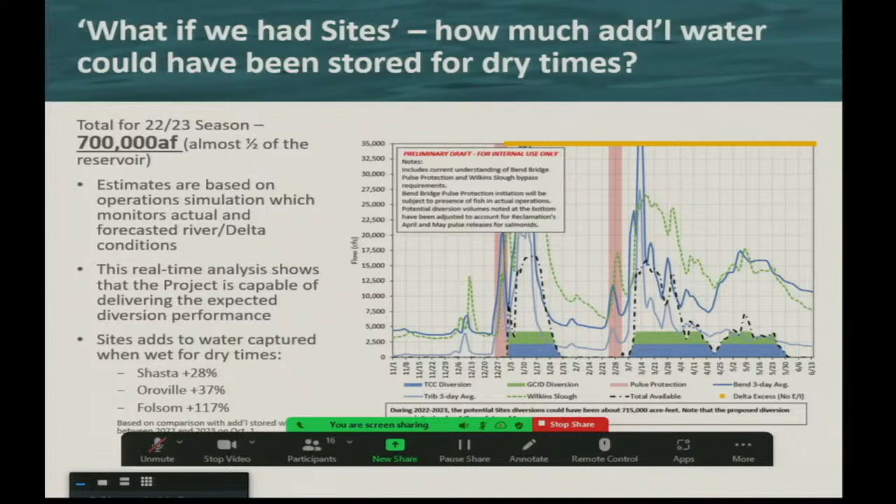And you know, when you look at the 700,000 acre feet, it may not seem like all that much, but when you put it into the context of what we're carrying over in our reservoirs for these dry times, it is substantial. You see the comparisons with Shasta, Oroville, and Folsom storage. This has substantial contributions to the amount of water that we will have available to us in the dry times in the future.

The Sites Reservoir project is a local-led project, and this is very important from the perspective of the north-south matters related to water. One of the reasons that it has taken so long is that the federal government and the state government were in charge for many of those years, and the local people did not like that. And it wasn't until they took charge in 2010 and formed this Joint Powers Authority that they actually started to get behind the project and local support grew.

And you know as well as anybody that you have to have local support for something like this to actually happen. So it is because of the leadership of these agencies and the folks involved that we've been able to get as far as we have. But it's really important to understand and realize that this is a local-led project that has statewide benefits.

It's a project that is uniquely situated relative to other elements of our water management system in California. And it's a project that really is adaptable for the changing climate that we are seeing and that is going to continue to evolve. We have analyzed Sites and determined that under any of the climate change scenarios that are out there today, anywhere from 0 to plus 15% is the improvement in the project as climate evolves and changes.

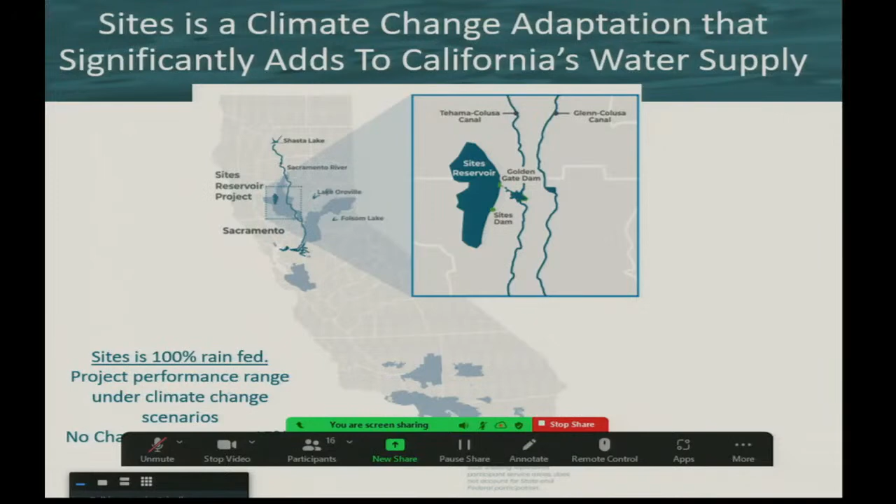And that's really important for us as a state, because we have to find ways to be able to manage water under these changing climate conditions, and having another resource like the Sites Reservoir helps us do that. Sites is 100% rain-fed. Sites is not dependent on snowpack, and that is largely why you see the improvement in the performance of the project with the changing climate.

Many of you have already been up there, seen the site. It's a beautiful empty valley, currently used for mostly cattle grazing. Spans about 13 miles long and about 3.5 miles wide in total.

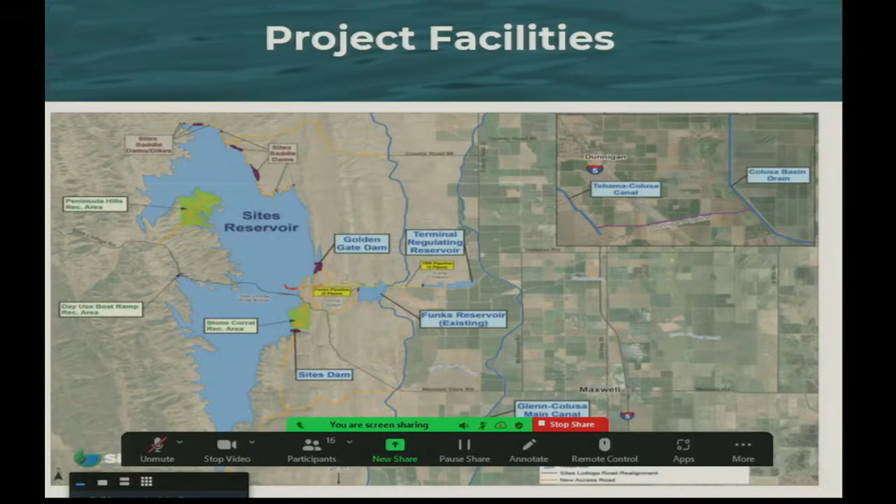Very important point here, these two canals, these two blue lines that run up and down the map here, those are existing canals that we're relying on for the conveyance of water in and out of the reservoir. Without those canals, we would not be a cost-effective project. So it's very critical to rely on the existing infrastructure as part of the facilities.

We have many participants, 22, that are all participating financially in the project. No one yet has actually made a firm final commitment in the project, and that is important because we're still studying and evaluating the project. But that point is coming very soon, probably within the next 2 years. Metropolitan Water District, of course, is on that list as a participant at this time.

And we have a waiting list. Right now, that stands at 13 participants, including yourselves. Thank you very much for your expression of interest in the project. That's been very important for not only the participants to know that this is a project of interest, but also statewide to highlight and allow other policymakers to see the need that is out there, the unmet need that has to be accommodated, which the Solve the Water Crisis Coalition is bringing forward in a very meaningful way.

I wanted to focus a lot of my attention on the Metropolitan participation, since you are a member agency of Metropolitan. So you see here each of the participants' quantities and amounts of the project in terms of their storage in the reservoir, but also the state and federal government.

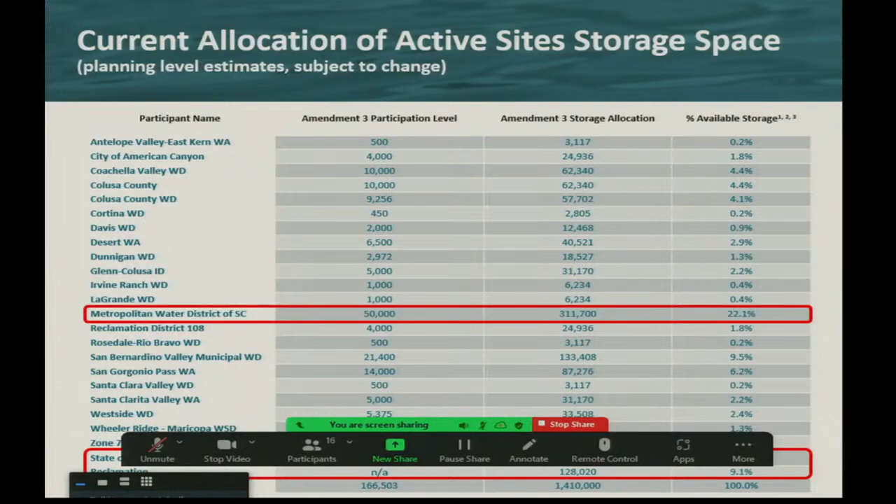And primarily the benefit that the state and federal government are investing in is for environmental purposes. We can't leave the environment behind. When climate changes, it affects the environmental flows, and we have to build projects that accommodate for those needs as well as for people and farms. I always like to say it's important, if you're going to spend $4.5 billion on something, that you know what you get. And so this is meant to describe that.

There's two things you get when you invest at Sites. You get a share of the storage space, so you get your own little condo in the condo complex. And you get a proportional share of any water that we're able to divert. And generally speaking, we're expecting about an average annual of about 300,000 acre feet.

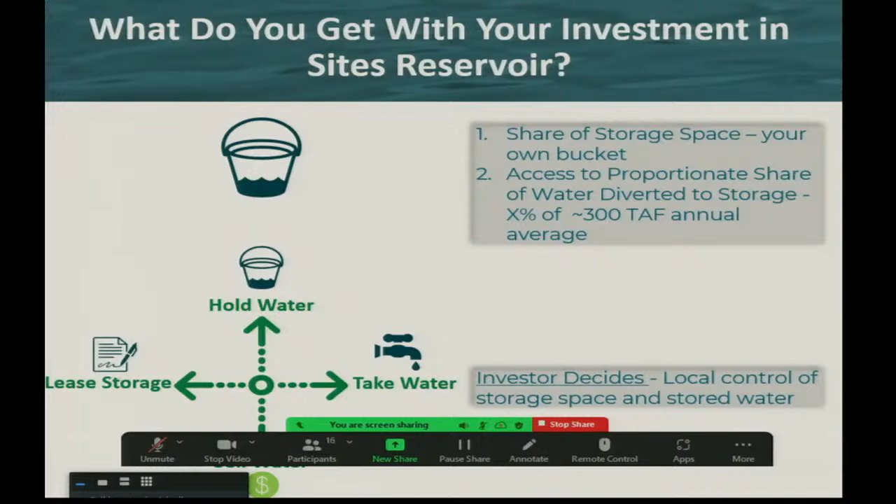So when you look at somebody like Metropolitan and you say, okay, they got 22% of the storage. So looking at 700,000 acre feet this year, 22% of the storage using those guarantees, they would have been able to put 155,000 acre feet of water into their 300,000 acre feet of storage space. That's for them to decide.

So that's how each individual agency kind of gets to manage their own piece of the reservoir and have local control. They could also forego their water if that's what they choose. I doubt they would do that, but they could do that, and someone else would be able to put that in their empty storage space. They could lease space for someone else. So what this co-op system creates is a way to exchange within the reservoir, and it makes for ease of movement of water across the state. And because the project serves all parts of the state, it helps the state better manage the water resource.

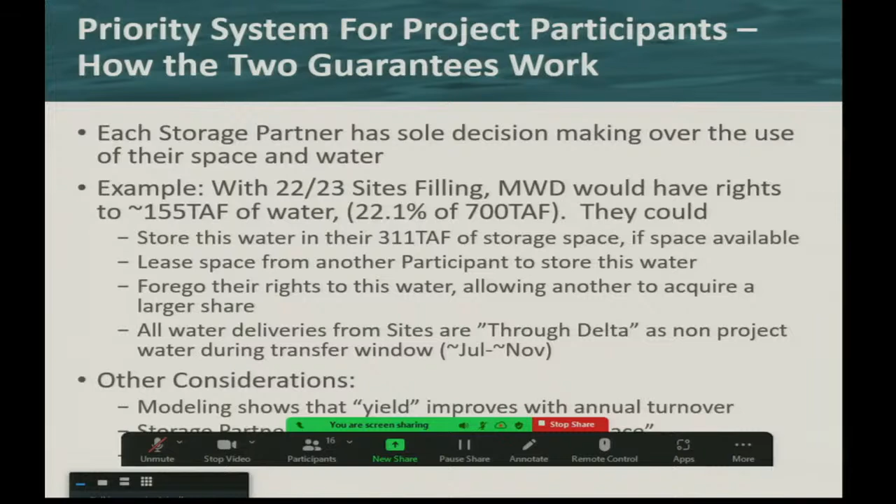And then the last thing I would just mention in terms of the waiting list is that as a waiting list participant, what we're trying to establish is that in that position, you are somehow given some priority over others in terms of your ability to receive transfers out of the reservoir. If we're not able to accommodate you within the context of being a full participant, we want to try to recognize the support and the contribution that you've made by giving you these kind of first rights of refusal to the transfers. And that's what the plan is as we go forward.

Funding is a very important part of any project. We are in a position where we have a majority of our funding fairly well lined up. A large part of the local participant funding comes through what is the WIFIA loan that we were awarded by EPA last year for a little over $2.2 billion. That's 49% of the project costs, and we're very thankful for EPA's recognition of the importance of this project.

The state is coming from Prop 1. Voters of the state in 2014 approved Prop 1 to include $2.7 billion. Sites is the largest recipient of that amount, and that again is mostly for ecosystems, but also for recreation and flood control. And then the WIIN Act, the federal contribution, and we're accumulating funds there.

A 16% contribution is what Reclamation has said they want. Right now, we only have room for 9, but they continue to accumulate the funds to get to 16. So all together with all those sources, we have the funding all lined up and ready to move forward. Reminder, a WIFIA loan is a loan, not a grant. So all that money will have to be paid back by the individual participants.

I don't mean to get into your business, but I want to share this because I think cost effectiveness is important for this project to move forward. Affordability is critically important for our participants. And this is intended to illustrate the affordability of the project from a Metropolitan perspective. Generally speaking, out of the reservoir, it's about $850 an acre foot on a unit cost basis. Estimate $450 to get it down here into the Met system. So total, all into the Met system is $1,300 an acre foot is the current estimate.

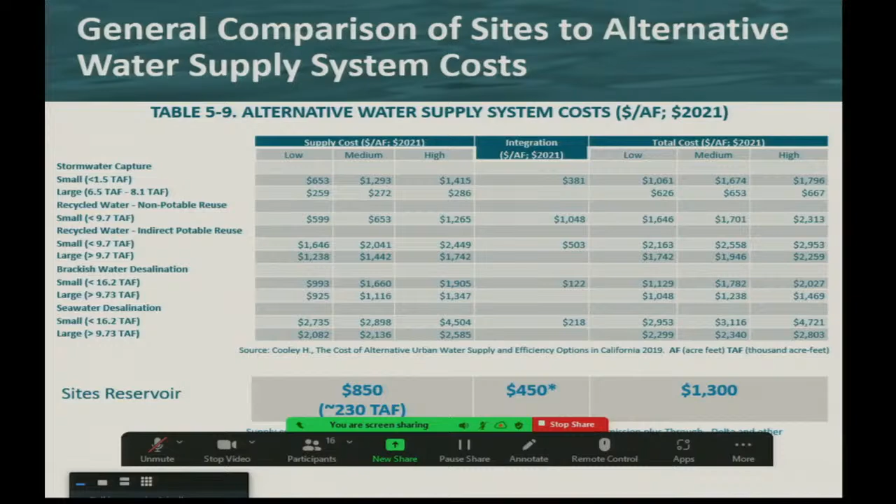And when you look at some of these other opportunities that are out there for water supplies, it is very competitive relative to these other opportunities. And I would also point out that it is substantial in terms of the amount of water that it generates compared to these other opportunities as well. Just want to give you a real quick update on a few areas.

Environmental planning and permitting. We are culminating a 6-year process, hopefully next month, to finalize and certify our EIR-EIS. That has been a very useful process for us, I think, because we've seen the project evolve and change to be something that is not only affordable but also permittable, and no project in California can get built without permits.

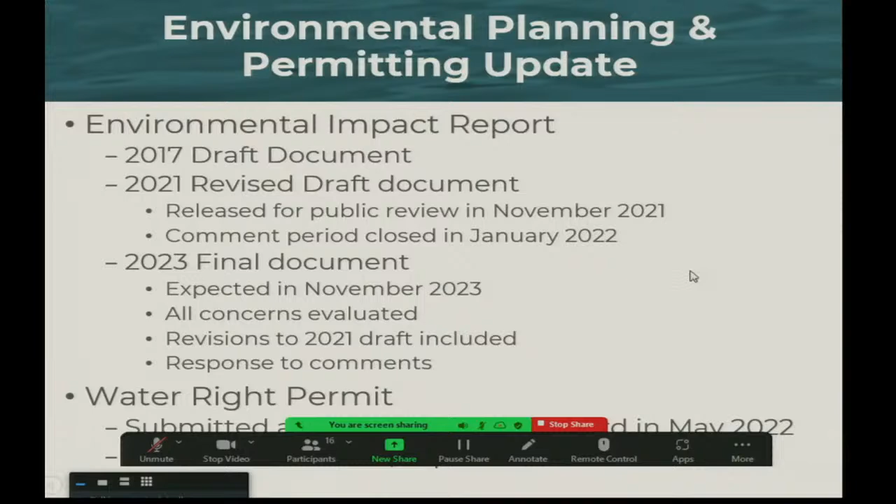The water right is a very critical element of our project. We are currently in the application and review process with the State Board. You might have heard we just closed the protest period, and I wanted to share, I'm trying to go to the next slide, but I'm not going. I wanted to share, if you could help me, thank you very much, appreciate that, Justin.

Others of these, I would say generally they're more concerned about the general aspects of taking water out of natural flow and also effects in the Delta, which we feel we have addressed, but they have some concerns that continue. And while we've been working with all of these folks for the last 6 years in our environmental process, and I mean literally having workshops and discussions about everything that we're doing, there's still some concerns that are felt to raise to a level of the State Board intervention.

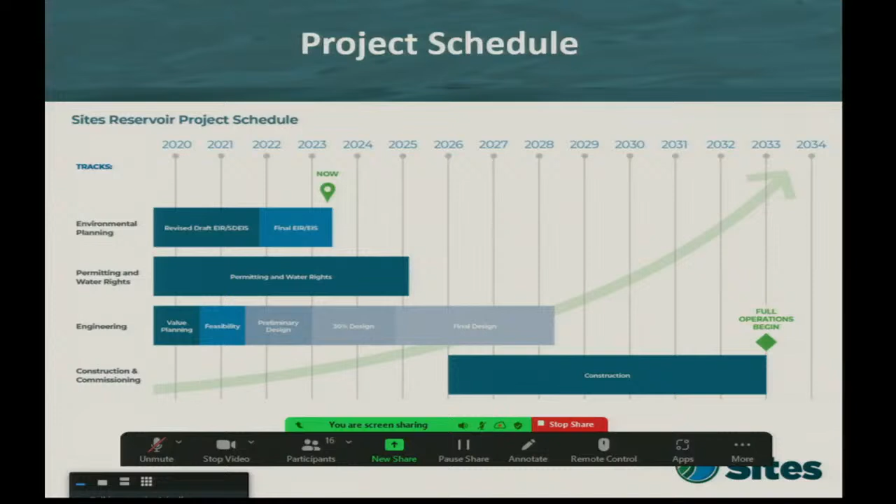On the schedule, this is my last slide. On the schedule, I mentioned 2 years from now, people got to make a decision. That's after we get the water right and a couple of key permits. At that juncture, then, all of the 22 agencies in the state and federal government will make their final commitments. Everything will kind of settle out as to where everybody lands in terms of their participation. And then we'll break ground and move forward through construction, which we estimate to take about 7 years, and completing in 2033. So with that, I'll conclude my presentation and be happy to answer any questions that you might have.

Thank you very much. Do board members have questions? Okay, go ahead, Laura.

Sorry. You mentioned when it had the protest slide that DWR did not protest, which was great. What was the second agency that you mentioned that sent something in, but it ended up being more of a comment letter? Bureau of Reclamation. Oh, that was it. Okay. They operate the Central Valley Project. Okay, Bureau of Rec.

I think I know what you're going to say, but the waiting list, is that because there just isn't enough capacity for all the people that want to draw from there? Yes. Okay, so they're on the waiting list in hopes that maybe someone will drop out and they might get it. Yes. And I'm trying to say also, they have a role to play here. You all are playing a role in helping to implement this project by being on the waiting list. You're showing your support. You're showing that you have a need. That is an important role to play in this project, and I say that should be rewarded to some extent. So I'm talking to the board about this first right of refusal idea. Okay, I like that.

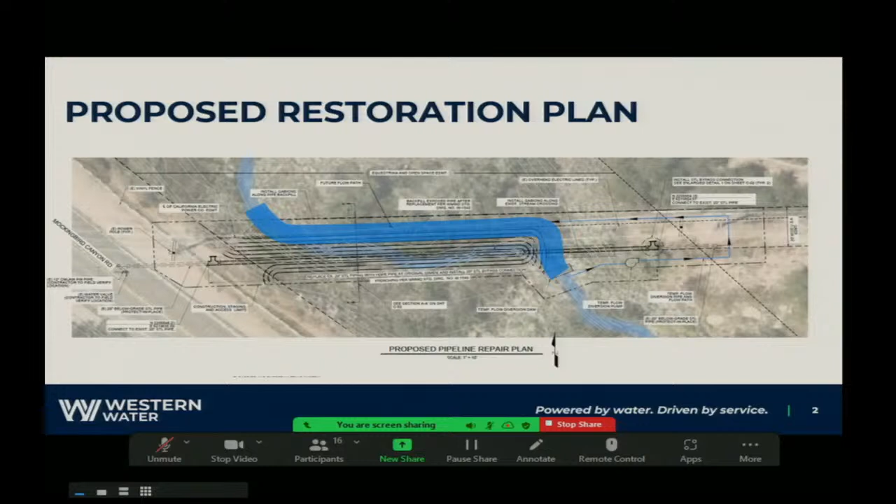We're also going to temporarily bypass the creek. We're going to put that into a temporary pipe, and then we're going to do all the construction. So we're going to basically move over the creek, and then we're going to have a space to put the pipe, reassemble the new pipe, and then we're going to backfill everything and put in gabions. The gabions will prevent the creek from wanting to go right back to where it was. Like retaining walls? Right, exactly. So that's the description of the project.

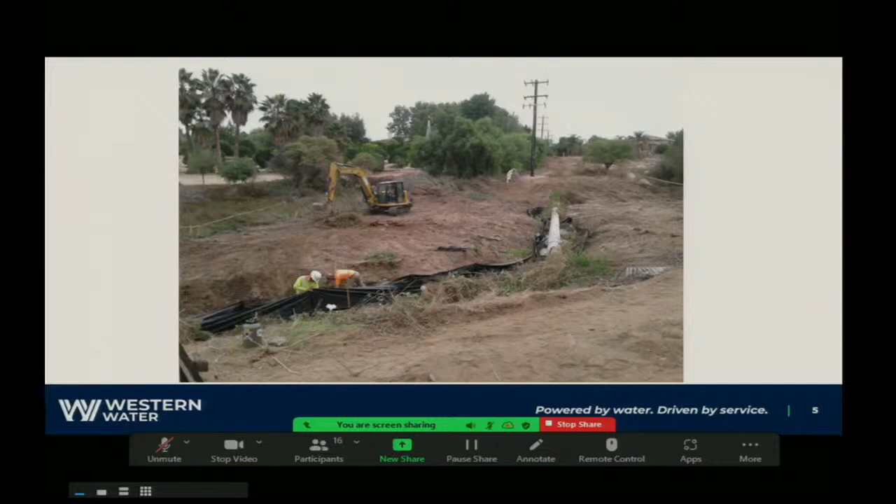So this is us removing the vegetation around there. Again, we got a permit for all of this work under the emergency permit with the Army Corps. And you can see the pipe where it is undermined. It's just not supported at all. So this is another photo of it. You can see we've graded the other side. That's where we're going to move the creek over to. And you can see them putting up basically filter fabric for allowing the creek to move through without erosion as we're moving materials around. You can see here we put some pipe supports below the pipe. We're like, hey, let's support this now so nothing happens.

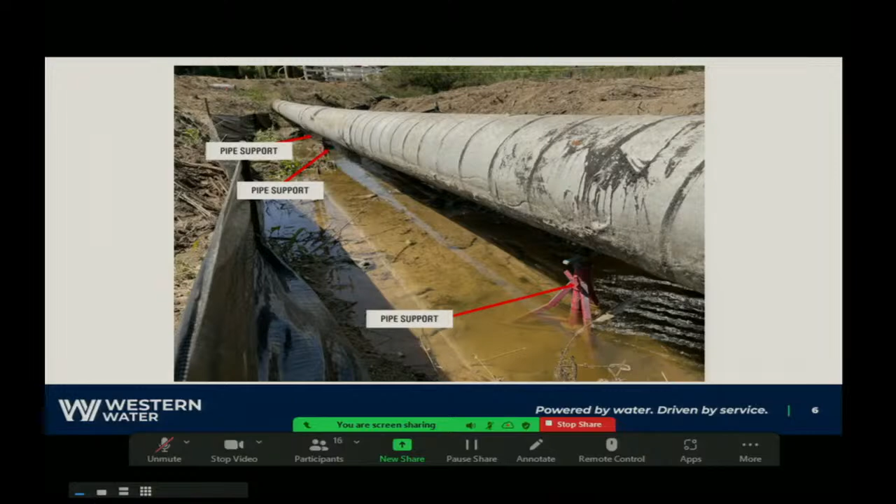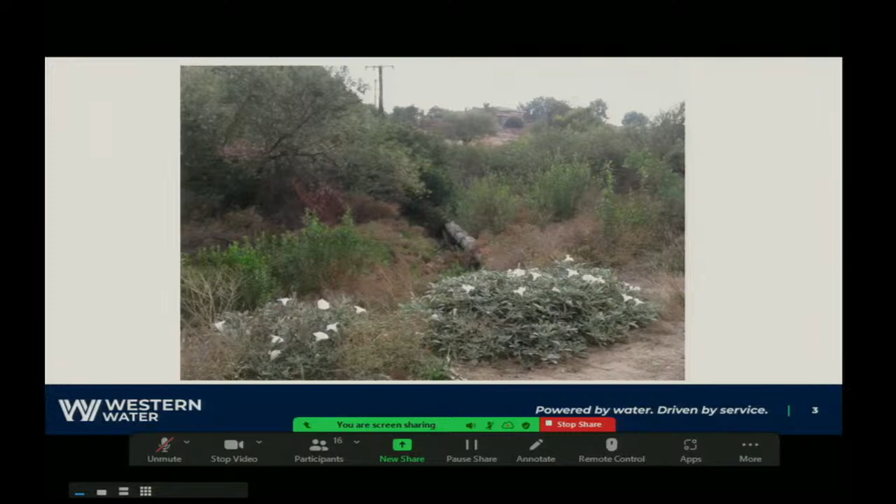And the thing is that we put this there. You can see we put the supports in right away. And over this last weekend, what happened was the thing sprung a leak. It was a slight leak, about 15 gallons per minute, but that's a precursor to, oh my goodness, that's a lot of flow. So we immediately put in a repair band. And a repair band basically is like a little rubber clamp that you put on there and you just cinch it down. Now, it only reduced it to about 1 or 2 gallons per minute. It's very temporary. It's like a Band-Aid.

And so we had to do an actual all-out repair. So we emptied the line to remove the pressure so we could weld on there. You have to basically chip away the concrete coating, and you have to make a spot so you can weld on the actual repair. And during that time, of course, you can't have it under full pressure. So we had to empty out about 400,000 gallons of recycled water very slowly into the creek. Of course, we did notifications to the Regional Water Quality Control Board, and we do have permits for emergency type repairs for that. And we dechlored it, and we let it out in a way that wouldn't cause erosion. So we put it in at the capacity of the creek.

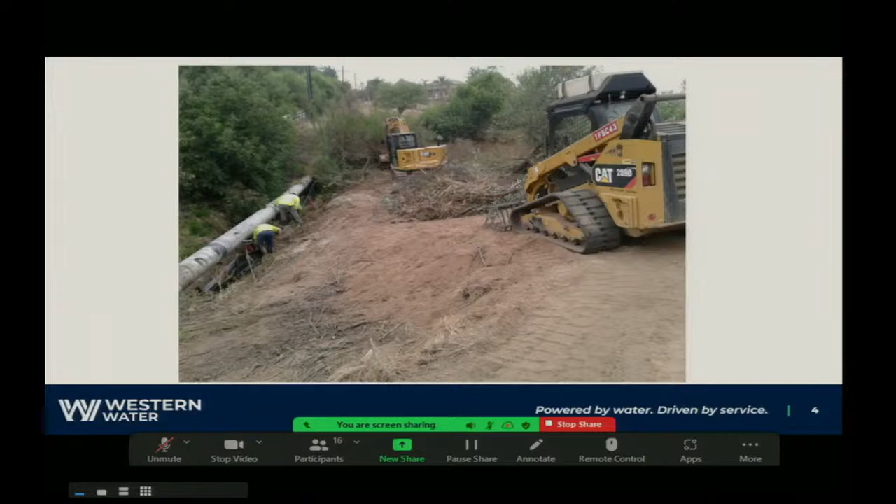So it's a good thing that we were out here at the time when the thing finally did start to break, because if we hadn't, then a catastrophic break is uncontrolled and will cause a lot of erosion and will cause a lot of damage. And if you go downstream from here, there's homes that are right next to the creek, there's a whole bunch of other things. So it's very fortunate that we caught this when we did. And I'm happy to say that the pipeline, as of this morning, is back in service, and we're serving our customers. And we are going to be doing the line stop on Monday, according to schedule. So it looks like we're going to recover. You know, we'll see what happens over the next few days because of this little thing happening.

And another aside, as far as challenges, the Army Corps, at the very end of last week, said, I don't know if this is an emergency. They did that on Friday. They were like, I'm looking at it, it looks like it's been there a while. I don't know if it qualifies for this permit. So we got busy, right? So we immediately got together a comment letter back, and we explained the entire situation of why we think we need to head this off before it becomes a problem, before it breaks. And they actually replied back on Monday, after it already leaked, and they said, you know what, you're right, it's an emergency. So they actually did agree with us as far as our approach. And we did not have to say, well, you know, it actually did break. It started to break. So we do view this as an emergency type repair.

So as far as the project schedule, we've been constructing the stream realignment, which includes that grubbing, all the grading that you've been seeing in September. We're putting in the temporary high line. We're in the midst of that right now. We're going to be removing the old pipe from October 16th through the 20th. We're going to install the new pipeline October 23rd through the 27th. And we're going to install the gabions on October 30th through November 6th, and then we'll complete the project November 6th through the 15th. That's our current schedule. What I've heard is that we should still be on schedule. We were actually a little bit ahead of schedule before the leak, and that's the only reason why we can recover and keep the schedule. But that's essentially my update, and I'm opening this up to any questions.

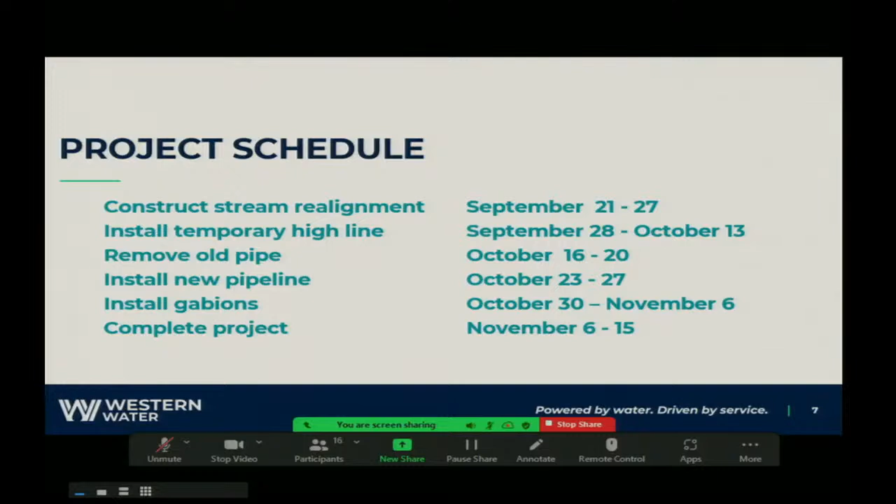Thank you, Derek. Any questions? No, just very, very good job, and glad you were out there when you needed to be. That's just great job in keeping this all intact. Do you need a motion to continue it? Yes, we did. So moved. Second.

Great job, thank you. We have no public comment? We do not. Okay. Would you please do a roll call vote? Thank you. Director Torres? Yes. Director Dinstead? Aye. Director Roten? Yes. Director Rizvi? Yes. President Gardner? Aye. Thank you. The motion carries 5-0. Thank you, directors. Thank you. Thanks, Derek.

Brings us to reports. Mr. General Counsel? I have no report, thank you. Mr. General Manager. I was hoping General Counsel would have a longer report. I got a few different things I'd like to highlight. I had a really good meeting with Adel Hagekhalil, the general manager of Met, this week. So that was last week. Whew, weeks are flying by. Last week. Met is super busy. Lots of big issues going on at Met.

So just to highlight our discussion, we talked a lot about PFAS. You may ask, well, why is Met worried about PFAS? Because it's not really prevalent in surface water. But remember, they are working on a recycled water project, and it is prevalent in some recycled water systems. So we are on the same page with Met in trying to get a waiver from EPA, since the wastewater treatment plants didn't cause PFAS and don't put any PFAS in the system. So good to collaborate with them on that.

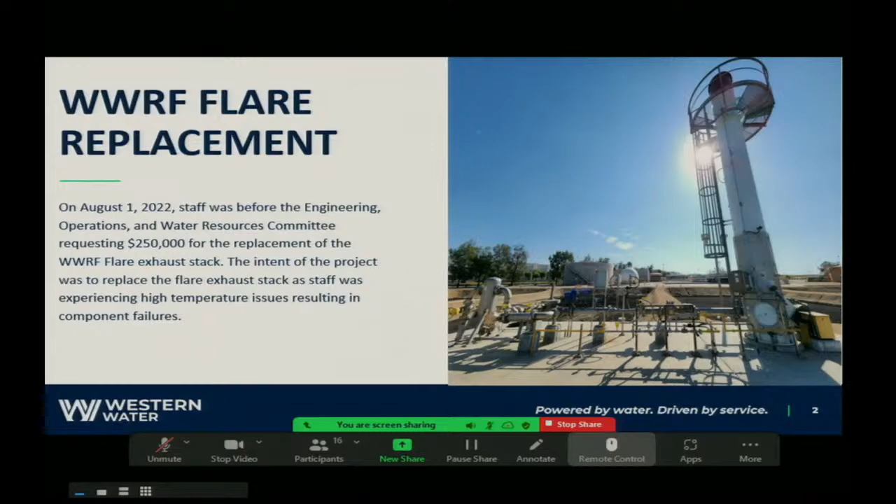We try and utilize it first beneficially in running equipment at the treatment plant, basically overgrown water heaters, if you will. This anaerobic digestion process likes to be about 98 degrees. However, if we don't need any heat to the digesters, what do we do with this excess methane? So we burn it through a flare. And in this photo, you can see the flare off to the right-hand side.

From the outside, the flare looked fine. It's a steel tube, right? And there's a flame inside of it, and exhaust comes out the top of it.

But looking inside, it's a completely different picture. That steel pipe was lined with ceramic Kaowool, a fireproof material, heat-resistant. And over the number of years that the flare has been in use, it's become dry and brittle, and you can see it was basically cracking and peeling off the walls.

Ultimately, gravity takes over, and those chunks would fall down, and they would block the burner that's in the bottom of the flare, block sensors that tell us if the flare is working properly, as well as exposing other electrical items. Thermocouples that understand the temperature within the flare would be exposed to higher heat and unprotected, and they were failing prematurely. So, long story short, we had to do something.

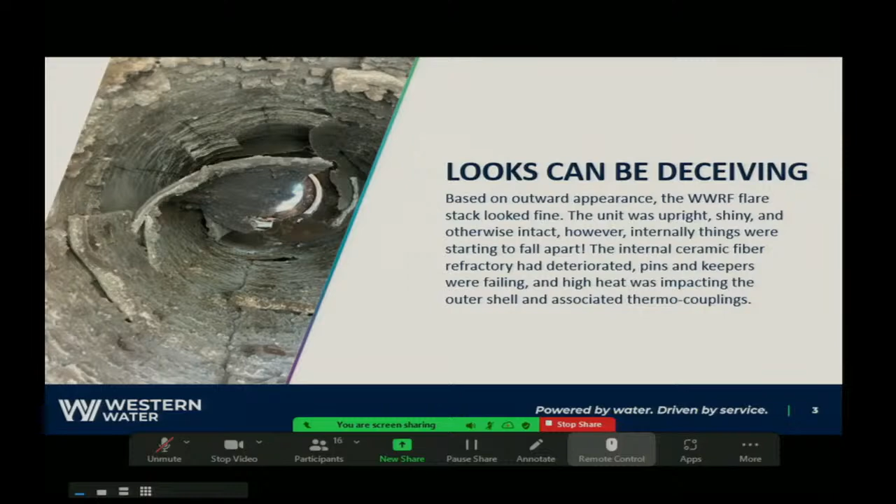So, staff reached out to Cimarron, who was the original manufacturer of the flare, and asked for a direct replacement of the original based on the drawings that we had. And that was really important because the flare is managed through permitting with Air Quality Management District, AQMD, and so we didn't want to get into permit issues, and so we bought this direct replacement, basically an exhaust pipe, if you will. So the order was placed, the stack arrived on April 20th, '23, and staff began preparing for its installation.

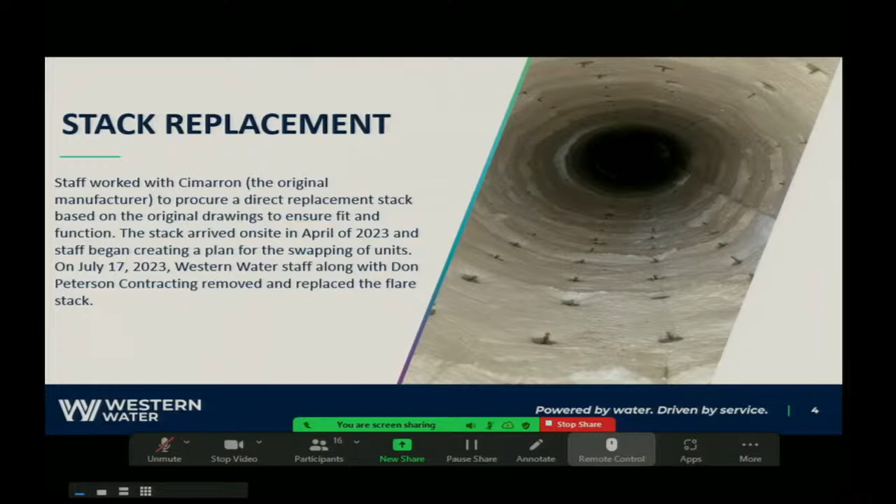I think as it came to the site, reality set in and staff started to get nervous, right? This isn't something that we traditionally do on a daily basis. They see this big pipe and flames inside, and oh my goodness, electrical components you can see running up the side of the unit, and so there was a bit of apprehension. And ultimately, we have to do something with the methane gas while we're changing out this flare.

So when we started this process, we started looking into portable flares that we could rent and maybe bring on site, and they were quite expensive, to the tune of about $10,000 a day. And the original guess was that it was going to take 7 to 10 days to replace this stack. And so you look at that and you go, man, that's $70,000 to $100,000 just to burn this methane for this duration.

And anyhow, long story short, operations kind of pulled together and refocused, and we brought this project back into focus that says, hey, really, we're talking about disconnecting electrical wires. We do that every day. It's unbolting pipe fittings and other appurtenances. We do that every day. So let's not let this get bigger than it really is.

So the team started working, getting the new replacement prepped while it was on the ground. We pre-ran all the electrical that we could. We dismantled whatever we could take off the existing while it was still in operation. The wastewater team formulated a plan that said, hey, wait, methane creation in the anaerobic digester is directly related to feeding the digester. So maybe we could hold solids back in the treatment processes, not feed the digesters, and therefore we wouldn't have methane to burn for a couple days. And ultimately we settled on, hey, we probably need 2 days to replace this unit.

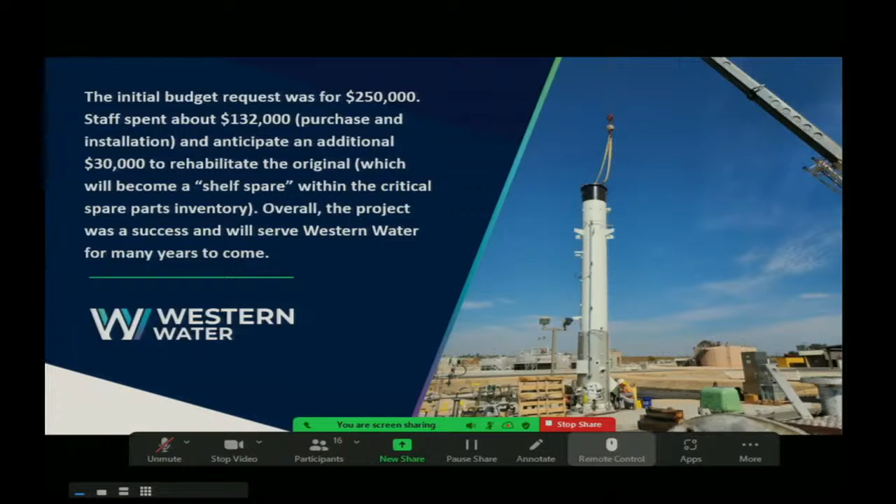This was phenomenal. When we saw it, I knew it couldn't just be shared with just engineering committee. I knew this had to be brought out and put out for public view for our customers to understand the great lengths that you guys go to take care of them, to handle business, and to make sure that we're saving money and time on the schedule as best we can. We're looking for those opportunities, and this was an absolutely fantastic demonstration of it.

Does that conclude General Manager's report? That does, thank you. Okay, thank you. Brings us to Director's reports. SAWPA did not meet yesterday. They were scheduled to, but canceled. Metropolitan? Metropolitan, a lot of stuff going on.

We did have a special board meeting, however, I can't discuss most of it because it was due to the department, the direct reports, evaluations and performances, and those were all held in closed session. However, after the conclusion of that, compensation was awarded to each of the department heads, with the exclusion of the person who was just hired for audits and the general auditor for the district. And it's going to be brought back that he be given a COLA because it was an oversight, I guess, in the process, that he can't actually even get COLA if it's not awarded directly by the board. So that's going to be coming back as an item for him to be able to get the COLA.